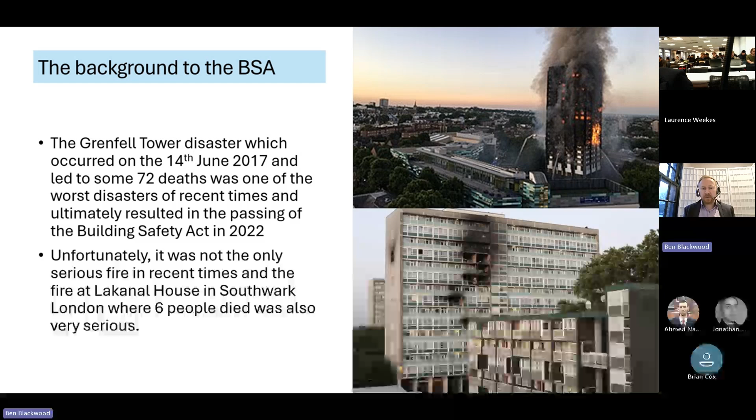So the background of the Building Safety Act all started with the Grenfell Tower. It was a tragedy where 72 people lost their lives, and it was one of the worst disasters for generations. It wasn't the only serious fire, and with hindsight, the warning signs were there that something serious was going to happen. The Grenfell inquiry looked into all aspects associated with the building and brought in a number of technical experts, including Dr. Barbara Lane from Arup.

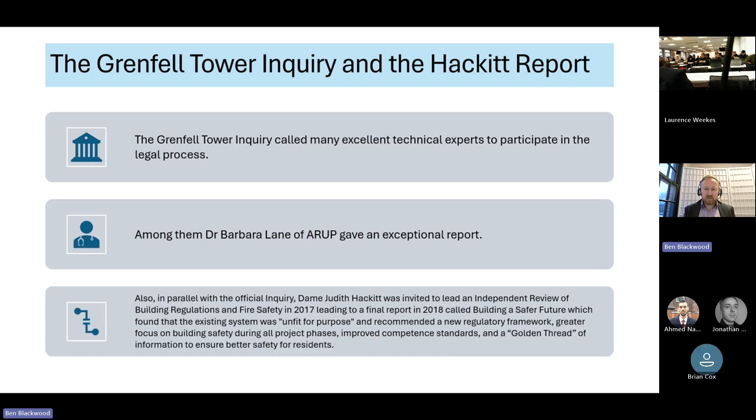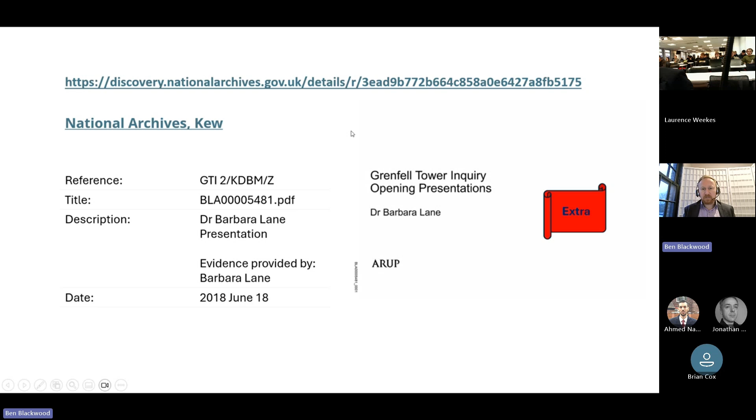And in parallel to that inquiry, Dame Judith Hackitt was invited to lead an independent review of the entire building regulation system. And if you want to understand how those regulations work together, it's really worth reading her final report produced in 2018 and some of the associated materials. She goes into all the regulations and shows how they apply at different times. And it's a really high quality piece of work. Likewise, Dr. Barbara Lane looked into aspects including smoke control in a great deal of detail, and we'll include the link with the materials so that you can read further on that.

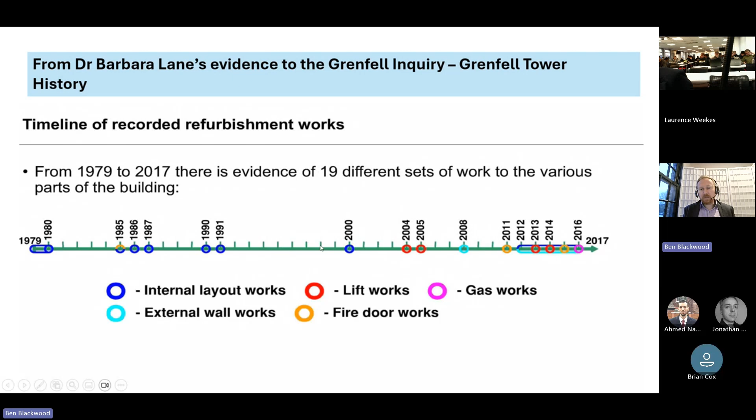So it's important to remember that when a building is built and then subsequent refurbishments are made, those refurbishments only need to comply with the regulations that were relevant at the time it was built, so in 1979. But those regulations didn't even contemplate rain screen cladding and those sort of elements of the external works and a lot of the other elements of work that are carried out as well. So some of those works were not really scrutinized in the way that they should have been. And we'll talk about the golden thread later, but you can see how the information from these various elements of work really wasn't available to the people that need it.

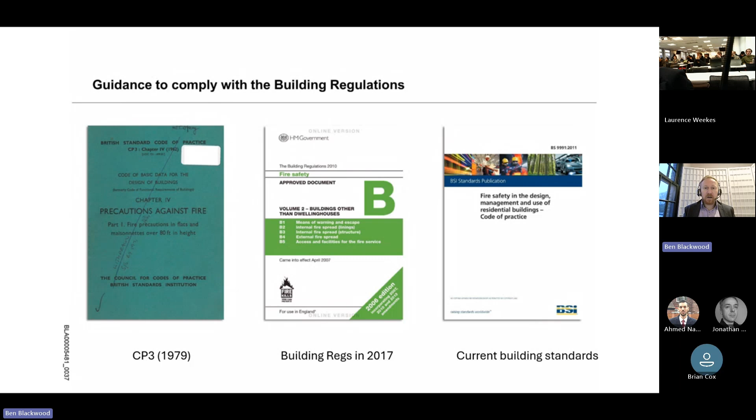And in 1979, the building control regulations that were available were very, very basic. Nowadays, we have Approved Document B, which tells us how we can comply with the regulations, and that was updated quite quickly after Grenfell in November 2018, and there have been subsequent updates as well, and it continues to evolve. There are alternative routes to comply, and the British Standards give us a lot of detail about that, particularly BS 9991, which has recently been updated, and that provides some really useful guidance on aspects of high-rise buildings, such as sprinkler design and how to design open plan flats. And the guidance in itself evolves as well.

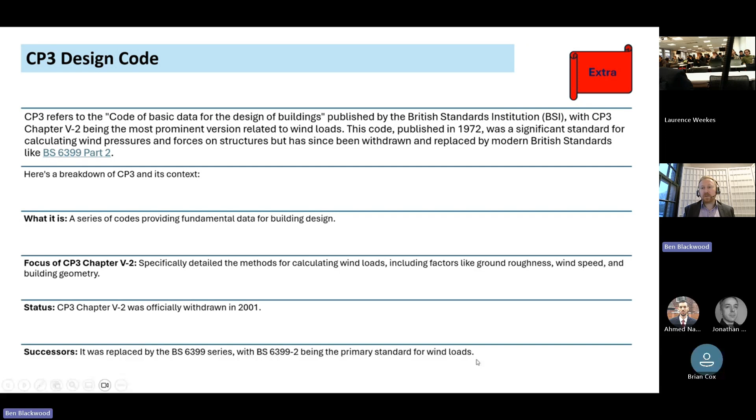So CP3 is that example there in relation to the wind loads, and has now been superseded by the BS 6399 series, which is now the standard that we use for calculating wind loads when we're designing the facades.

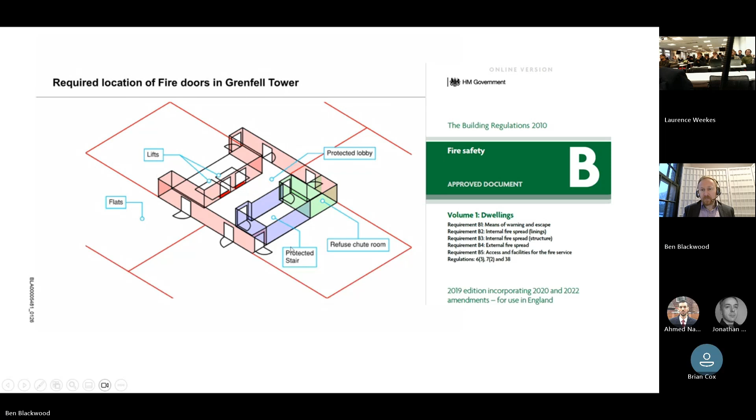So Dr. Barbara Lane looked into the smoke control in a great deal of detail. So from this isometric you can see here, these red lines illustrate the compartments. So each apartment is an individual fire compartment, and the apartment front door, which is 30 minutes fire resistance and self-closing, stops the fire from spreading into the protected lobby. And obviously the lifts stop working in a fire. So the principle that these buildings are designed to is that the fire strategy would only ever consider that there's one flat on fire at any one time. So the occupant would then escape through the lobby into the protected stair. And Approved Document B gives us the guidance which tells us that.

So Dr. Barbara Lane looked into the smoke control design. So as we say, it was designed on the basis that one apartment would be on fire at any one time. The occupants would escape via the lobby and down the stairs. Obviously, during that process, a small amount of smoke will escape into the lobby when they open the door, but that door should be self-closing and should close behind them. And likewise, when they open the stair door, that should close behind them.

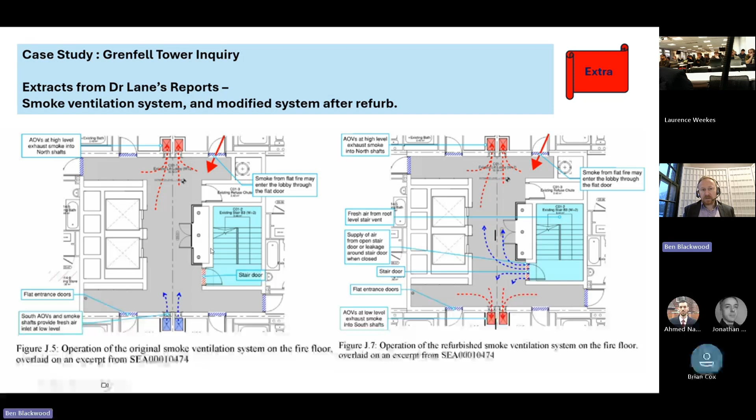So this is the principle of how the smoke works, how the smoke control system works. The smoke would come out of the flat and accumulate, a relatively small amount of hot smoke. So it's going to rise, and then you would have a 1 meter square damper and a 1.5 meter squared shaft, either mechanical or naturally ventilated. So the hot smoke would rise up.

And when the 1 meter squared head of stair vent in the stairs opens, it draws fresh air down the shaft. And when the door is opened by either the escaping occupants or the fire and rescue service, that then provides make-up air, which allows that hot smoke to escape.

Unfortunately, in Grenfell, the dampers were at low level and they were much smaller than you might expect, so it didn't really facilitate the smoke control system to clear that smoke very effectively. We've also learned that drawing air down a building which has got a fire in it can also be challenging due to stack effect.

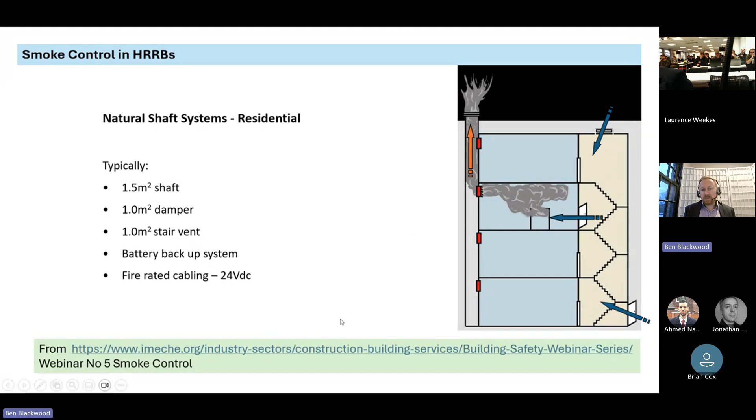The design of smoke control systems is covered in a lot more detail in the EN 12101 series of standards, or if you refer to this link here, there's a more user-friendly overview provided by the IMechE.

Dame Judith Hackitt's independent review covered all of the building regulations and fire safety. She essentially concluded in her final report in 2018, called Building a Safer Future, that the system was not fit for purpose, which led to the Building Safety Bill, which then, following royal assent, became the Building Safety Act.

The Building Safety Act is such a huge change from what we are doing. It is the single greatest legislative step in a generation. In relation to construction, all people working on high-risk buildings have to completely change the way they work.

Part one is an overview. Part two creates the building safety regulator, a new governing body which replaces the building control authority from the local borough council for higher risk buildings. The local borough council will still cover the lower risk buildings, but for higher risk buildings the building safety regulator will take over, and they may appoint the local building control to do their inspections for them, but it goes through the building safety regulator.

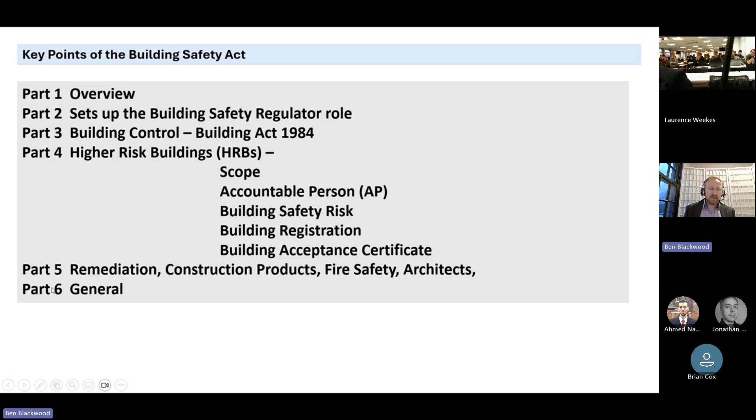Part four is really where it starts to tell you what you have to do. It creates the concept of the accountable person, tells us how to manage building safety risk, and gives us definitions about what a building safety risk is, which is effectively something which has the potential to cause the spread of fire or structural failure. There's a process of building registration and a new process for achieving a building acceptance certificate. It also covers remediation, and it does cover construction products, but this is not fully in action as yet. It covers fire safety and governs the competence of architects, and there's a general provision at the end.

When we talk about a higher risk building, we're talking about a building that's over 18 meters, or at least 7 stories, and contains 2 or more flats. That's measured from the fire service access level, so sometimes when buildings have a lower ground level, it can be measured from there. There's a guidance note which defines how the building is measured.

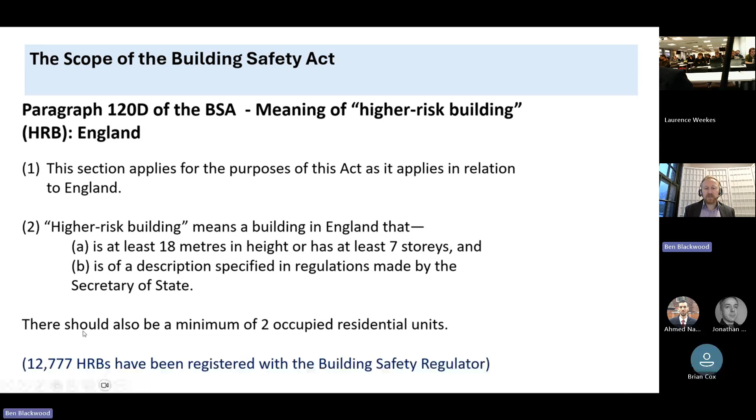To date, there's nearly 13,000 higher risk buildings registered.

The accountable person, or principal accountable person, is the key person that the regulations point to. One of the first jobs to do is establish who the principal accountable person is. There can be multiple accountable persons for a given building, but there can only be one principal accountable person for any area, and that gives them the legal responsibility and accountability for reporting to the regulator and maintaining the golden thread of information.

For establishing who the principal accountable person is, it's really important to understand who has the key legal stake in the ownership of the common areas. When we talk about common areas, obviously corridors and hallways, lobbies, reception areas, roof terraces, external landscaping. The buildings that I deal with, we have a lot of work-from-home spaces, lounge areas, cinemas, gyms, yoga studios, this kind of stuff. We even have recording studios in some of our buildings now. So those are all common areas, and whoever owns those is the principal accountable person.

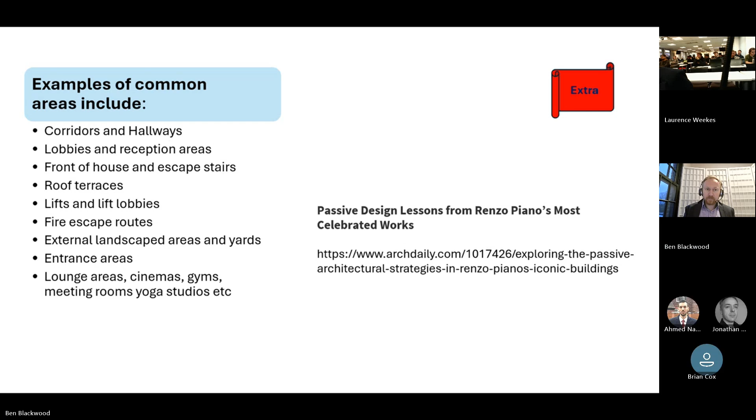An example here is the Key Building Information, etc. England Regulations 2023. Basically, once you've registered your building as the principal accountable person—for my company, that's me—I log in and register the building with my name and address, and the building name and address, and basic details about that building: how tall it is, how many flats are in it, and so on.

Once that registration has been accepted and lodged with the regulator, I have to log in again and provide what's called the key building information. For example, this goes through and asks: does the building have sprinklers? Does it have AOVs? How many fire doors are there? What's the facade made of? All these things. And in reference to structure, for example, you describe what the main material is.

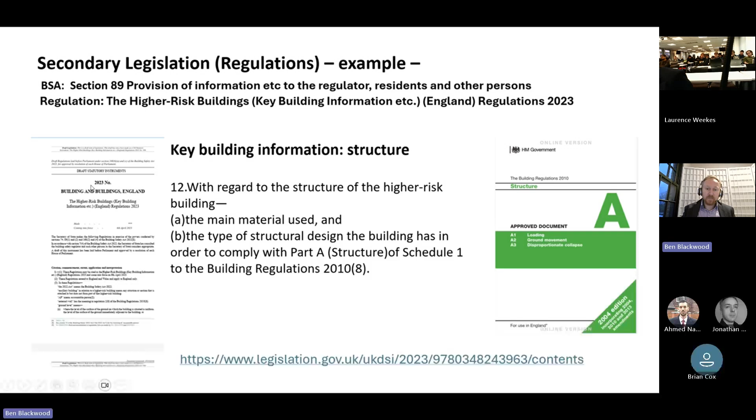modern large panel system buildings, which are a very modern take on a modular building, essentially. So it's two skins of concrete with a layer of mineral wool in between, and we have the windows pre-installed and the finishes pre-installed, and we bring them on a truck from Holland and put them together like Lego, creating a really high quality building with less labor on site. So I need to describe all that in the key building information and provide it to the regulator.

One of the recommendations from the Hackitt report was to have a mandatory digital system of record keeping. For companies of the size of the company I work for, keeping a digital record of our building is nothing new—we've been doing this for years because we build our buildings and we don't sell them, we keep them forever. For us, for business reasons, it's the most efficient and effective way of managing your information and keeping it structured.

To make sure that every time you have to do something or provide information, or if someone's selling a leasehold flat or whatever and they want information, we always have it. So for us it was just the logical thing to do, and we've had it already in place for about 20 years, but most companies actually don't. So we had a bit of an advantage in this respect.

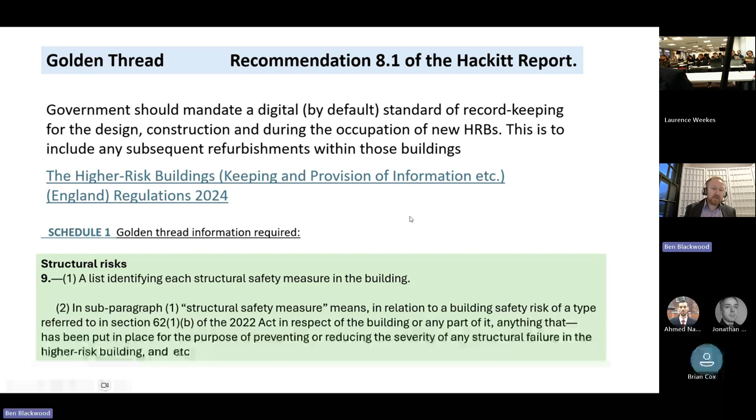And we already complied with this legislation before it came out. But we do have to make sure that we monitor our compliance to make sure that we're following the regulations at all times.

So just to give you an overview—some of the text on here might be quite small, but I've provided this more for reference—it's to show that it's not just about construction. The construction of the building is this little bit here. Before construction, we have Planning Gateway 1, which is about providing a fire statement with the planning application, and that's governed by the Town and Country Planning Act and the Planning Department, and your golden thread starts there.

When you've got your detailed design, usually at stage 4 plus, RIBA stage 4 plus, you would have your fire strategy, your qualitative design review, etc., and you would make that application to the building safety regulator.

So you go onto the .gov portal, a bit like doing your tax return, and you follow the steps and upload all your information. It's meant to be done in 12 weeks. It's no secret that the regulator hasn't been able to comply with that.

One of my buildings was one of the first ones to be approved, and it took 63 weeks. It's a lot less than that now, but realistically, we are planning on the basis that it's going to be 20 weeks.

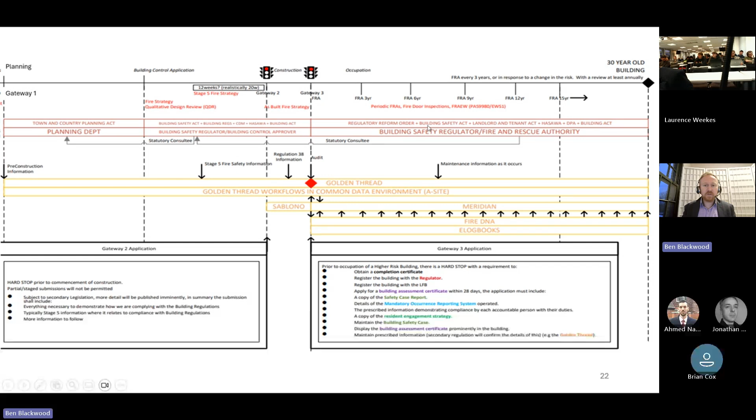And we have to provide things called building safety cases to the building safety regulator during occupation, and we will come on to that in a bit more detail.

Hosting all of this information is a significant IT challenge. So there has been a standard ISO 19650 that's been around for a while, and BS 8644, which gives us some guidance on the management of fire safety information.

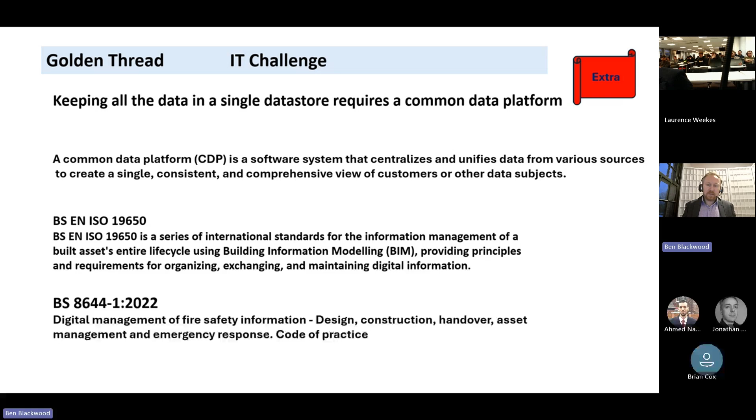So these talk about naming conventions and things like that, and there are portals and systems that are designed for hosting this type of information.

But there's no one system that can do it all. Like I said, we used a system called Sablono for keeping our site records.

So during the early stages of the design, we would have a building information model, and we would have drawings and technical submissions. We also use a thing called an external wall matrix, which is basically a big matrix that just checks we've got everything that we need to have.

And then we use a system called Fire DNA for monitoring our fire doors, because once they're designed and compliant, we have to check them quarterly. That's one of the pieces of secondary legislation that means we have to check those fire doors every 3 months to make sure they remain compliant and close in the way they should automatically, as we saw in Barbara Lane's report there.

So we use a system called Fire DNA, which works on QR codes, so you can scan it with your phone and it'll tell you when it was last checked, what the performance is, and if there's any problems with it. So that forms part of the golden thread, and that talks to our central system.

We also have a fire risk management system which gives us live data on things like the sprinklers - are they working? Have they been maintained, has their annual inspection been done and do they work properly? Has the wet riser been tested in accordance with the standard, and so on.

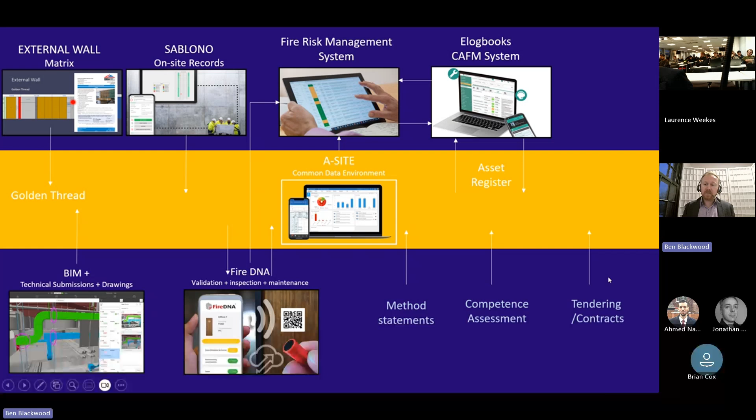And obviously, we have to work safely, so we have method statements and risk assessments for all of our works, and we assess the competence of our contractors, and we tender them to make sure that we're getting fair value. And the records of all of that goes into the golden thread as well.

We can then take information out of the golden thread to register our buildings with the London Fire Brigade and provide them with information. So if there's an incident, in the back of the fire engine, when they're attending that incident, they have a tablet and they can open up the information we've provided and find out about the building they're arriving to before they get there.

The only challenge with that is in central London, the attendance period is usually around 3 to 4 minutes, so they don't get much time to look at that information by the time they arrive. So we have hard copies of that as well, and we present it to them when they arrive. We keep that in a premises information box that looks like that.

The high-rise building registration process requires us to export information from the golden thread. And if we have to do any subsequent works - for example, there's a shop on the ground floor that's changed owners and they need to refit it into an art gallery or whatever - then they take the information from the golden thread.

And we use that information also to do a thing called a mandatory occurrence report. So if we discover something which has potential to contribute to the spread of fire that could affect multiple people, then we have to fill out a mandatory occurrence report, and we need information from the golden thread to report that to the regulator.

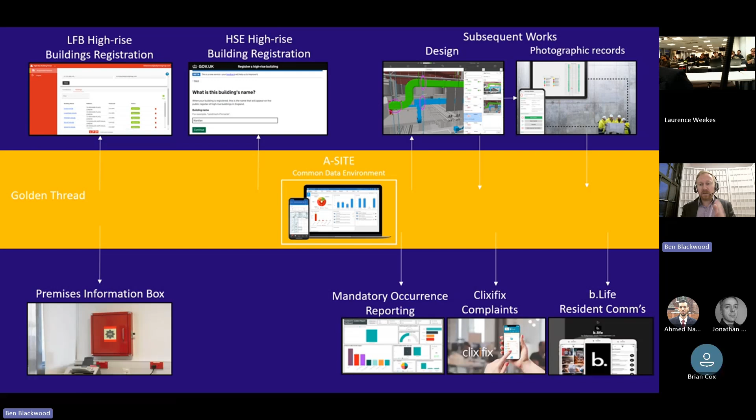It's a really good way of providing them with information, reminders. For example, there might be a festival coming up, so as a reminder, during the festival don't leave candles unattended, don't use fireworks, don't have a barbecue on your balcony - things like that, just as timely reminders to help keep yourself and your neighbours safe.

So the implementation of this golden thread - like I said, I was very lucky that most of our buildings have it already. But sometimes, as a principal accountable person, you might have just bought a building that was built by someone else. So you need to then build that golden thread, and that can be really challenging.

Some buildings have no information at all. So what I do is I make up a little schedule that has the basic minimum. This schedule here is what I use as my checklist. So if I haven't got all of these things, then there's a real problem.

So I would look for a fire risk assessment, a type 3 fire risk assessment. I'd look for a structural risk assessment and look for fire strategy reports. If I don't have those things, then I'm going to have to get them - so I would commission a structural risk assessment if there isn't one, for example.

If there isn't information about the fire separating elements, like we spoke about earlier, we design flats on the basis of it being a safe compartment. So you're safe in your apartment for usually at least 30 minutes, usually 60, as long as you're not affected by fire and smoke. That way you don't have everyone trying to evacuate at the same time and clogging up the communal areas, potentially exposing themselves to smoke and other injuries. But none of that works if the fire separating elements are not robust.

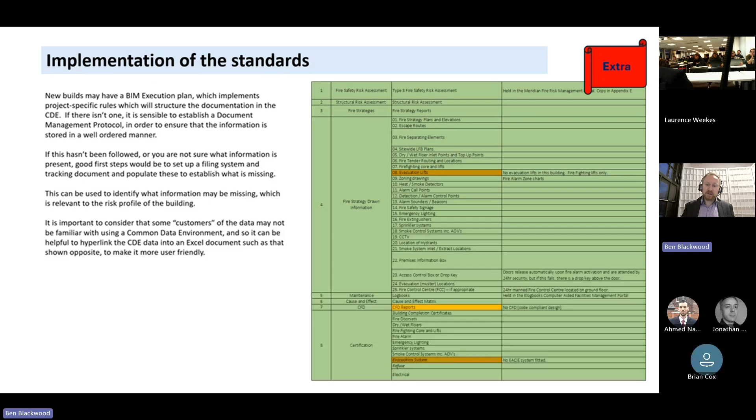So the Building Safety Act, when it came in 2022 - the idea was to completely change the way we think about higher risk buildings. So, like I said, Gateway 1 is about planning and the design of the building at the planning stage. Gateway 2 is this process that's very detailed and goes through the building control process, and this is the big challenge that all builders are going through at the moment. Gateway 3 is making sure that the buildings are ready for occupation. Not many buildings have gone through Gateway 3, and that is going to be just as big a challenge as Gateway 2, but the reason we haven't heard about it is because we haven't got there yet, basically.

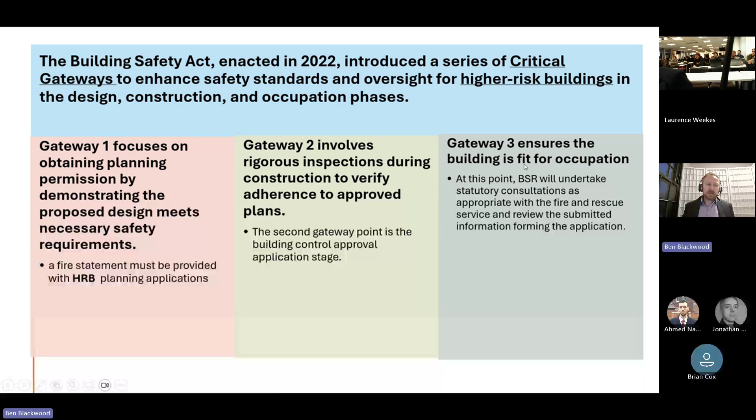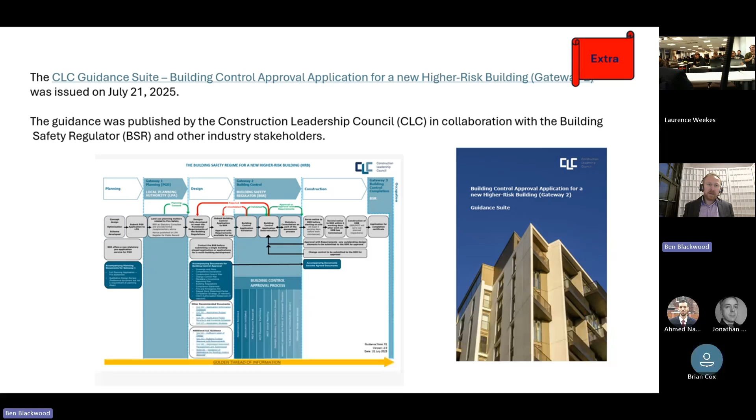One of the reasons Gateway 2 is such a problem is that builders are just not ready to provide information in the way that it's produced, and the regulator, frankly, is not ready to read the information in the way it's produced. So there's a lot of learning on both sides. The Construction Leadership Council has tried to bring that together by providing guidance to the industry. There's some really good work here, and there's a link available at the top there.

So we talked about building assessment certificates earlier. So you might see these. They have to be provided in a prominent place in the building. Now, not many buildings have them. Last time I checked, it was around 15, but that was a little while ago, so it's probably a bit more now. But you will see these appearing probably on the ground floor in the common areas of higher risk buildings.

So basically, if you've got a building assessment certificate, that means that a safety case report has been provided by the principal accountable person. They've got a system of mandatory occurrence reporting. They've got a system demonstrating compliance, and they have a resident engagement strategy.

So the safety case is the biggest ingredient. That basically is a case that puts together the argument that says that this building is safe because, and it goes and it works like that. So it's a little bit like a thesis. You know, the ones that I write, they're typically around 60 to 70 pages, and there are appendices of around 22 to 26 documents.

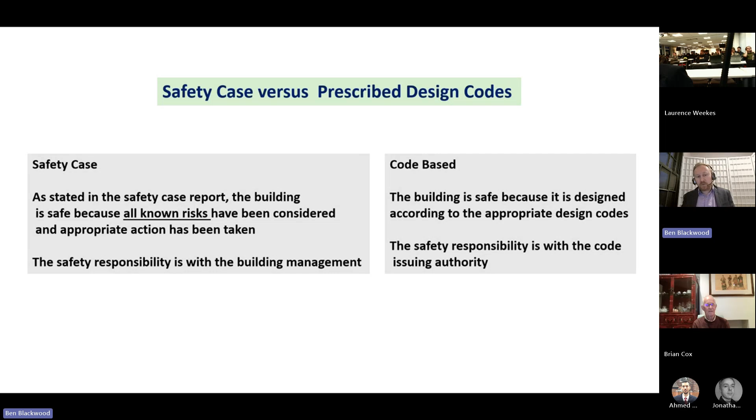So engineering controls are always the most preferred method. So you engineer out the risk so it's eliminated. And only if that's impossible or not feasible or not cost effective, then we would look at the other options via the principles of prevention.

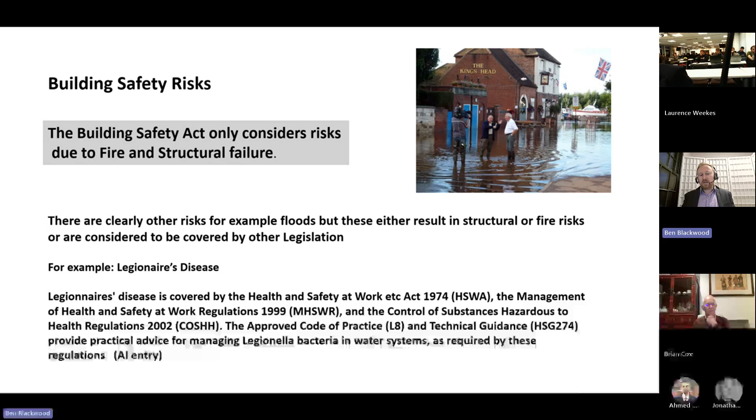So to try to put some manners on the process, the Building Safety Act only considers risks of fire and structural failure. Other aspects like Legionella, for example, are covered under the Health and Safety at Work Act. Legionella is obviously about water safety, and there are other regulations that cover the other things. The Building Safety Act doesn't cover everything, but it does give us a way of managing our process.

So, for example, in the company that I work with, the risks of Legionella we manage in the same way as we would manage a building safety risk, just because it's a good way of managing risk. So we assess risks via different methods. For example, in a typical year, we would do a water risk assessment, a structural risk assessment, a fire risk assessment, and every 5 years we would do an external wall fire risk assessment as well, and a general health and safety risk assessment.

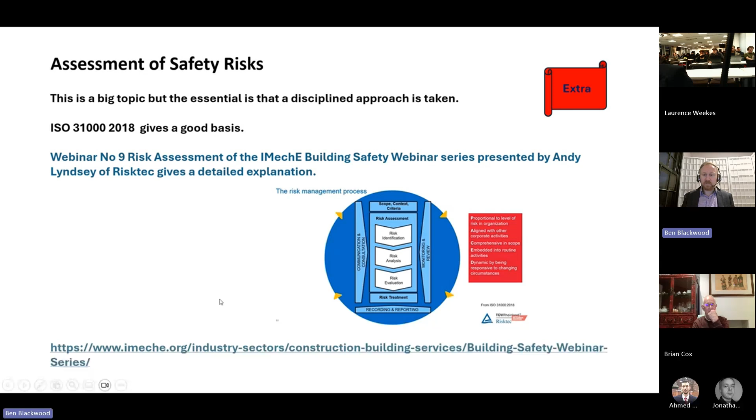And we would do targeted risk assessments for other things as well, because we have quite extensive leisure areas with multiple swimming pools and spas and gyms and yoga studios and so on, so we do separate risk assessments just for those, and a playground risk assessment as well. So all those risks identified in that process go through a risk management process, and there's a link here that provides a bit more information about that.

But if we don't have compartmentation, then a lot of our controls fall down. Compartment flats are basically designed on the basis that we have reliable compartmentation. So that means that the fire can't spread from one compartment to another within a prescribed period of time, which gives enough time for the occupants to escape.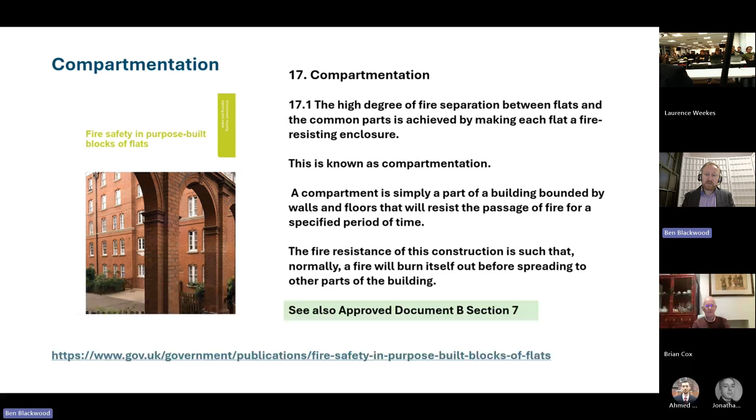So the risk assessment process goes through a system of identifying hazards, and compartmentation is one of those key things. So a compartment wall, for example, would be a plasterboard wall typically. And then we have fire stopping, which is where some penetration has been made for pipe work or whatever. And the fire stopping is usually a mineral wool batt, which is friction fitted in the space.

So it's dense mineral wool and it gets compacted into the space, and it has an intumescent coating which reacts and expands and fills any gaps when it gets hot. So if those systems are not in place, smoke and fire can spread between compartments.

If, say, for example, those fire doors are not up to standard, then the compartment line is broken and the risk increases, or if the doors don't close, then you don't have a compartment at all. So that's why there's so much emphasis in the secondary legislation about automatic door closers. And again, the smoke control system is fundamental to that as well.

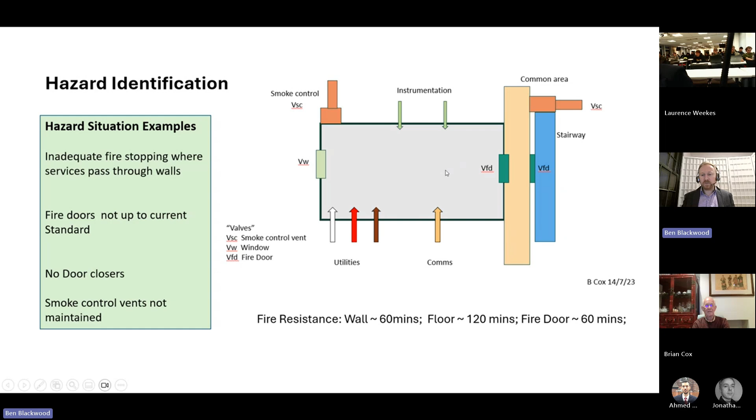I'm just going to bring Brian in here because he's a real expert in this area. So he can give you a bit of information about the history of the safety cases. Okay, I hope you can hear me okay.

So, as Ben said earlier, safety cases have been around for some time and have been extensively used in other industries, but are something new to the construction industry, or at least the construction of residential premises, certainly. And I just put here a sort of brief history of safety cases.

The first big major incident, which was followed by the introduction of safety cases, was a significant release of radiation at Windscale nuclear reactor in 1957. And as a result of that, the Nuclear Installations Act includes the production of safety cases, just like Ben described his 60-page document. I think the nuclear safety cases are really huge documents sometimes.

And then in 1974, the Health and Safety Act was introduced, which is a kind of very general act covering the issue of safety in the workplace. It was the result of a commission chaired by Lord Robens. And that introduced the idea of a duty holder. In other words, somebody who was responsible for that piece of equipment or that building or that installation, somebody who had responsibility for making sure it was safe.

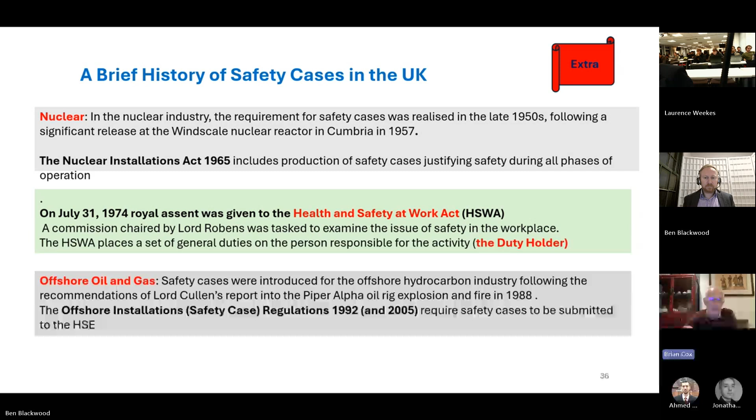The Piper Alpha oil rig really only affected directly the people who were working on the oil rig because it's in the middle of the North Sea and not many people nearby. So we go to the next slide, please.

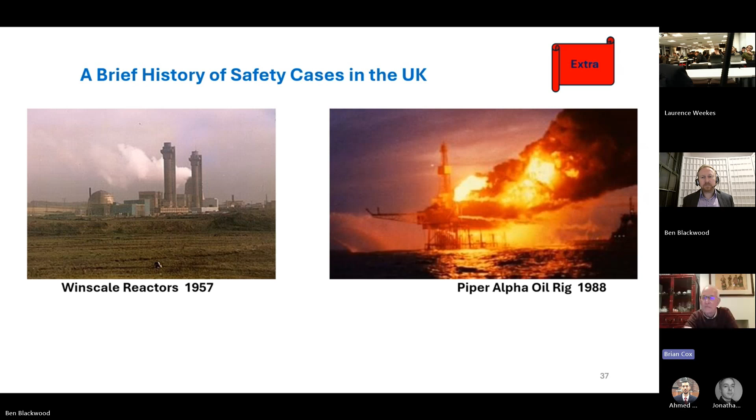And then in 1999, there was the Ladbroke Grove rail crash, perhaps one of the worst rail crashes. And here we see the first example really in this series of passengers being affected. So obviously, if you have a rail crash or an air crash, we have a lot of passengers involved and potentially a very high number of people could be killed directly. It doesn't so much affect people outside the situation, but this is a lot of people in the situation.

And then Grenfell Tower is, as we said at the beginning, one of the worst fires in a residential building. There have been some equally bad ones abroad, but in the UK, it's probably the worst one. And again, we've got large numbers of people in these buildings, but in this case, they also affect the people outside the building to quite a large extent.

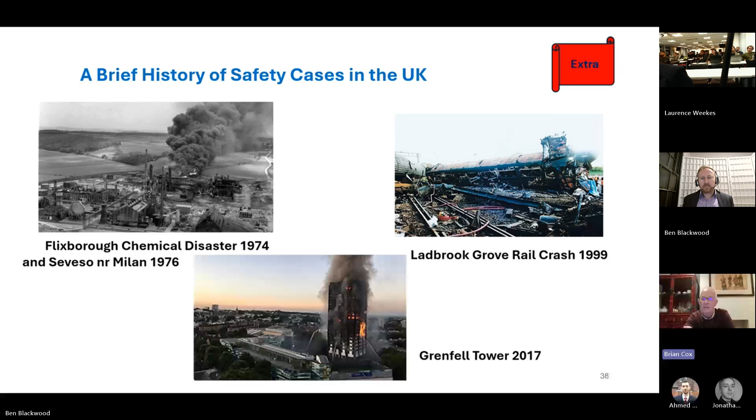Next slide, please. So there's the Control of Industrial Major Accident Hazards, called CIMAH, introduced in 1994. That was actually brought in as a result of European Community regulation. The railways introduced safety cases in 1994, and then first of all the civilian one in 2010, and the military one followed shortly afterwards. And then we had the Building Safety Act in 2022.

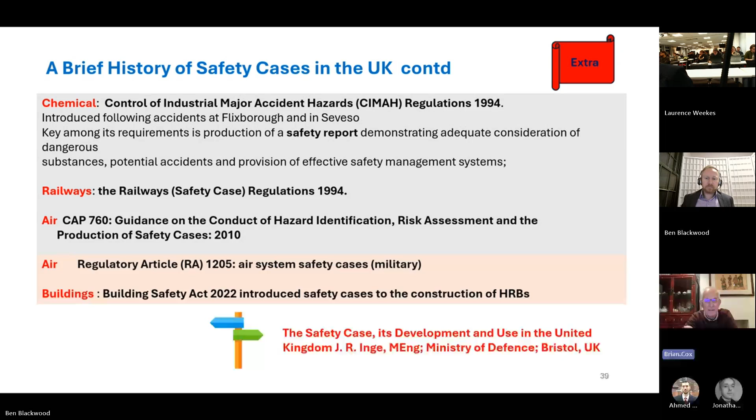And there's quite a good write-up of the history of safety cases by Mr. Inge, which you can find online very easily. Next, please.

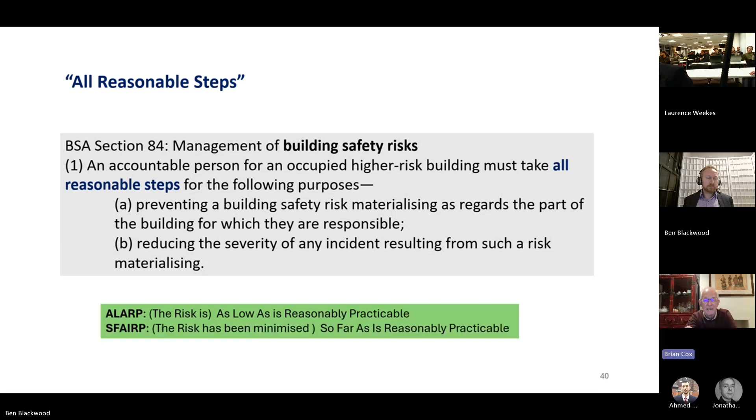So one of the things about building safety risks, which we have to look at in arriving at a safety case, is how far do we have to go? And in the Building Safety Act, it says we have to take all reasonable steps. So that means we have to take all reasonable steps to try and prevent one of these big calamities happening. And also we have to take all reasonable steps to try and reduce the severity of such an incident if it does happen. So the first one is trying to prevent anything happening. The second is trying to reduce the effect of this happening to its minimum.

So why do we need a safety case? Well, I think there's two real reasons. The first is these big disasters are fortunately very uncommon. We don't see many of them. That means that there's no statistics about them, and we almost have no way of forecasting them. So the only thing we can do is to look at all the risks and try and make sure we've covered everything we can and taken all reasonable steps. And equally with minimizing, we have to imagine if something nasty happened, what could happen and how would we take care of that? So most big accidents actually involve a series of incidents when you look into the examination.

So for example, in a building, usually this is a fire in a flat. It might be due to a badly maintained appliance, an old fridge or an old washing machine. Or recently, a lot of fires have started where people have been recharging electric bike batteries, and the bike battery has gone up in flames, and these things are a really bad source of fire.

And then the second part of the sequence is the fire escapes from the building, from the original compartment that it's in. And quite often this has been through the window, because the window is often the weakest point in some of these buildings. It may be old windows. It may well be that the windows have been left open by the residents, so the fire can go out quite easily. And then the fire needs to find additional fuel.

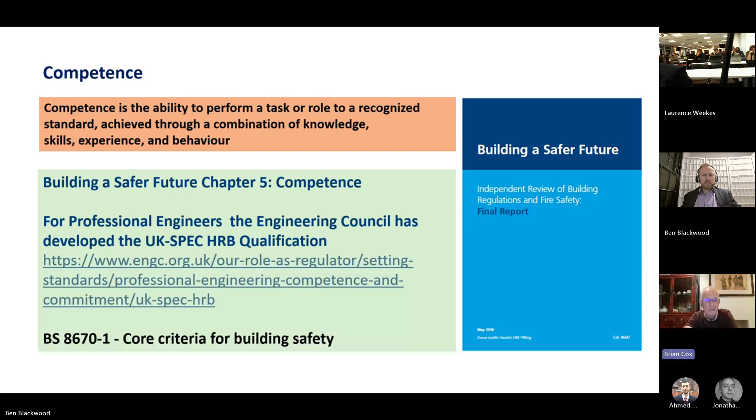The Industry Competence Committee, which is one of the committees set up under the Building Safety Act, have realised that this is quite challenging for a lot of people, and they've put out a series of competence principles. I'm not going to go all through these, but essentially this is a plan to see whether your current employees are competent, or a contractor you want to employ is competent, and how you keep on checking that competence is maintained, and how you manage things like information and change related to competence.

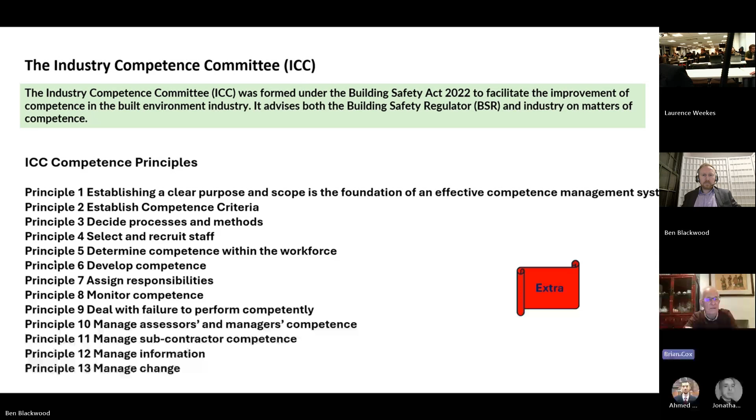For example, if a new competence level is required for certain things, have you built that into your system? So last but not least, I think what we have to suggest is you need to keep a lookout for new information coming.

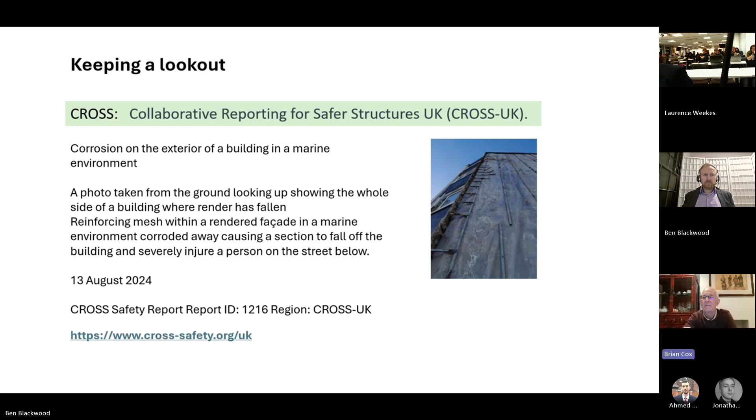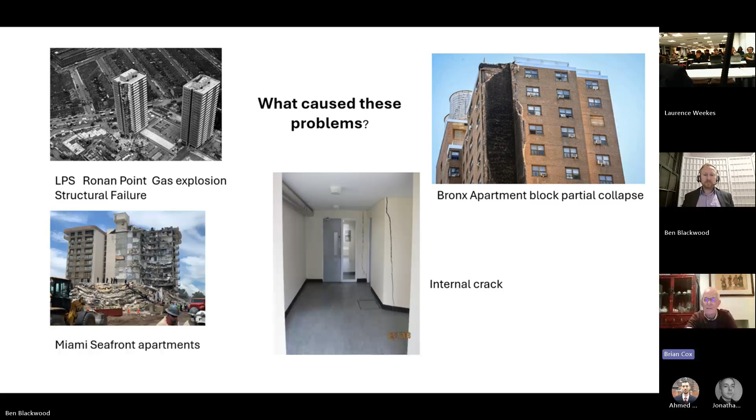Okay, I'm sure Ben has some experience of this.